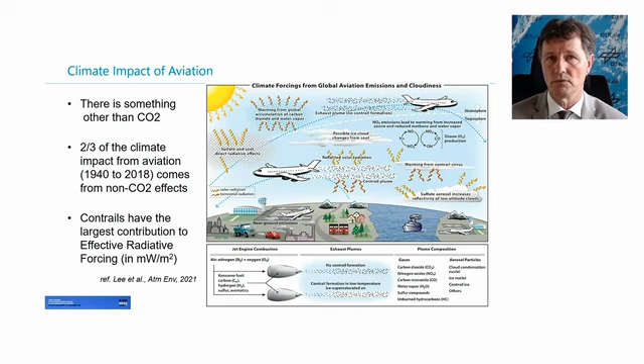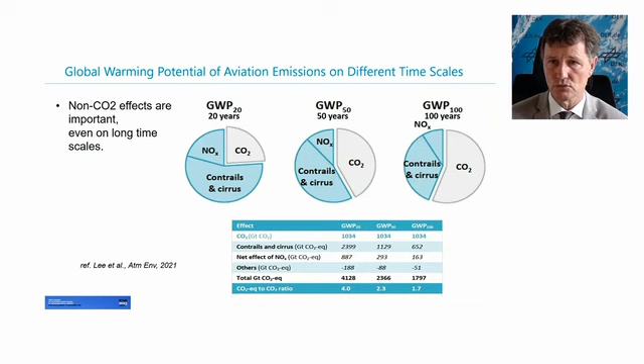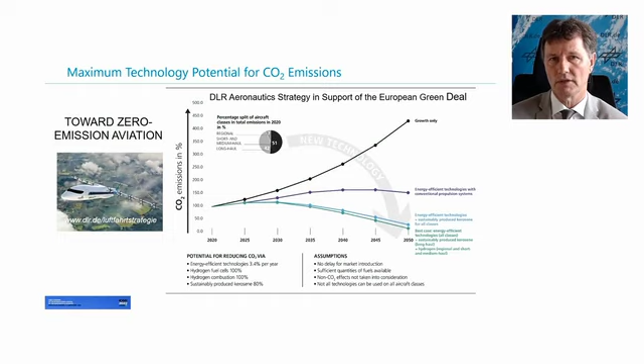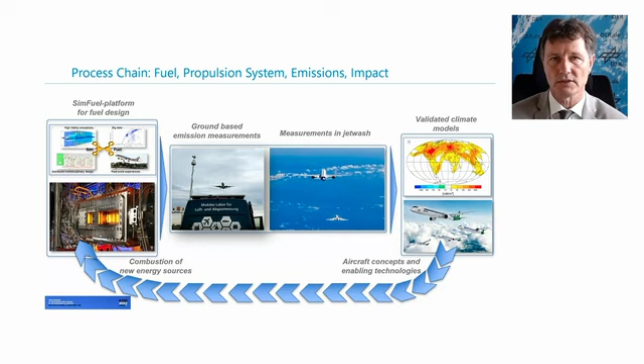Since 2014, DLR plus partners have systematically studied the use and impact of bio-based kerosene in three ECLIF campaigns under real conditions. The first campaign in 2014 with the outlined partners showed as a major result that a 50% blend with HEFA fuel, which is hydroprocessed esters and fatty acids, reduces soot by roughly 50%.

On top, the second campaign in 2018 showed that this 50% soot reduction results in a reduction of ice particles in the same order. In the recent ECLIF campaign, which Airbus has flown with Rolls-Royce, Neste and DLR, it could be shown that an A350 XWB-900 with Rolls-Royce engines was flown on both engines with 100% SAF fuel. A big success.

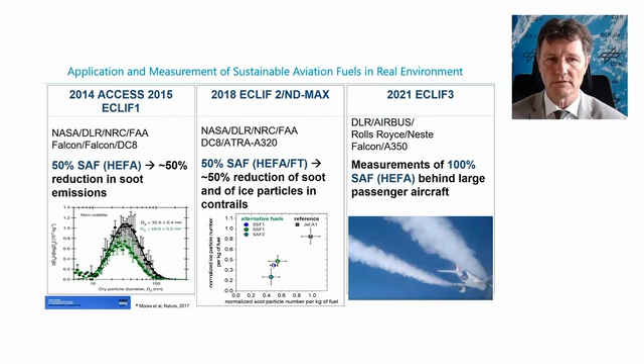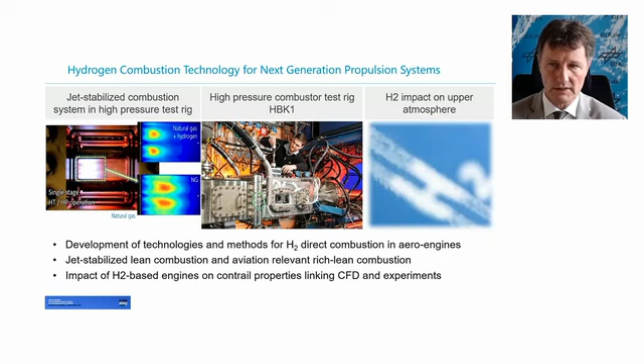Of course, the impact of released water by fuel cell operation is also part of these studies, but not shown in this presentation.

And with this slide, I will finish my presentation and thank you for listening.

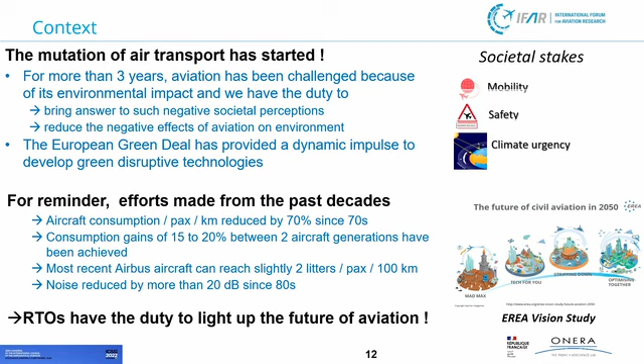And of course, we do that as a collective, like IFAR, for which we are speaking today. And it was also mentioned by Ibrahim earlier when he spoke about EREA, which is, let's say, the European sister of IFAR. EREA produced about 18 months ago its vision study about what could be the future of aviation in different scenarios in 2050. You've seen this slide so many times that I will skip it.

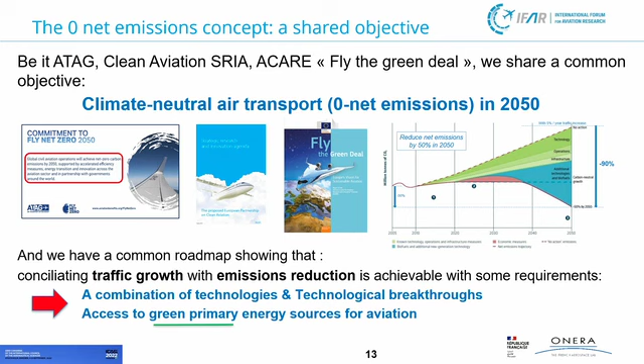We are all trying to drive this curve back. Maybe just one message here is to remember also that all the efforts and all the results will not necessarily be provided by the aviation community. For example, green hydrogen will probably be provided by specialists of that, because the need for green hydrogen far encompasses the needs of aviation alone.

So we have to reduce emissions - and what kind of emissions? I will quote again Markus saying CO2, but not only CO2. We will think about that. You have just here the reminder of the real contribution of aviation in terms of CO2 emissions.

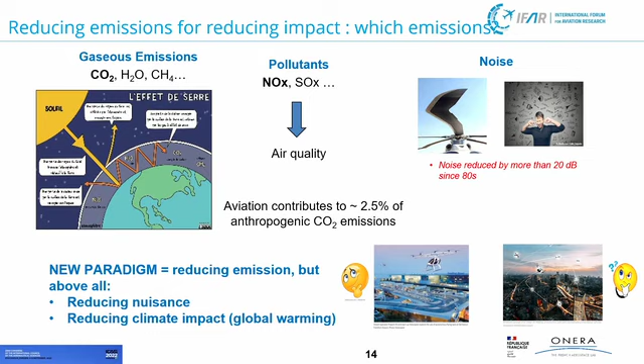How can we do that? I will try to illustrate that. We are working on 4 major axes: low carbon fuel, energetic efficiency, aircraft electrification, and operation. I will just select one example amongst many others in each of the first 3 axes.

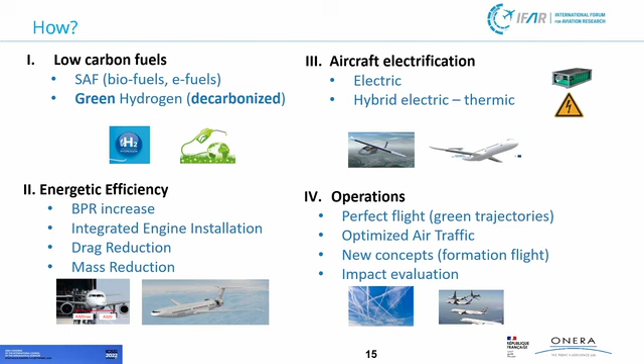Starting with low carbon fuels - Markus has spoken about SAF, so I will speak a little more about hydrogen. Once again, reminding that not all will come from the aviation community, but of course the aviation community has to face very interesting challenges in terms of technology, research, and also science to answer the hydrogen needs. And it's important also to remember that hydrogen will not be the answer to all the problems of all the segments of aviation. It will answer a part of it.

One of the major phases we will have to face will be the tank volumes, the cryogenic aspects, and the injection and combustion problems that it brings. On the bottom right of the curve, you can see a big calculation example made by Onera teams with a new injection chamber concept, including 4 injectors for hydrogen combustion.

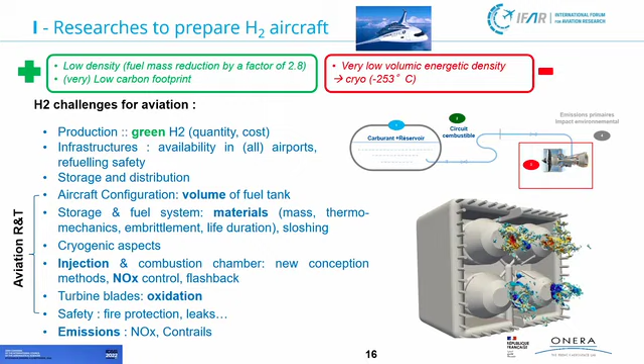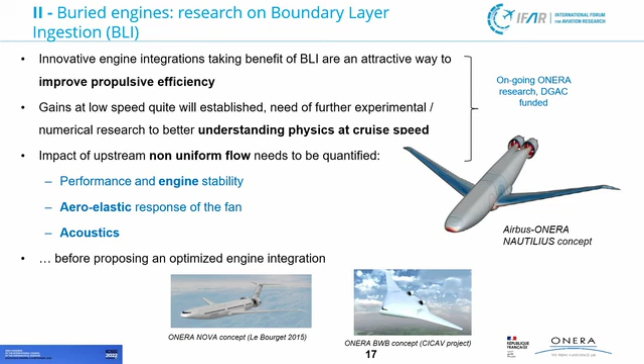On the second topic, improving propulsion efficiency, I've chosen to illustrate it with something called boundary layer ingestion, which is well known in some fields like low speed, but other fields have to be investigated. As you can see on this slide, there are quite different designs for the planes, and one interest of this BLI concept is that it can adapt to almost all kinds of configurations and propulsion.

Third axis, with 2 slides, is electrification. The first is to introduce probably the most important European effort under funding of the Commission, a project called IMOTHEP. You see the figures on the bottom right: 33 teams involved, from academics to big industry, 9 European countries, 2 international partners, under coordination from Onera. It's dedicated to 2 kinds of segments, regional transport and short and medium range, and we are working on conservative configurations going to far more innovative ones.

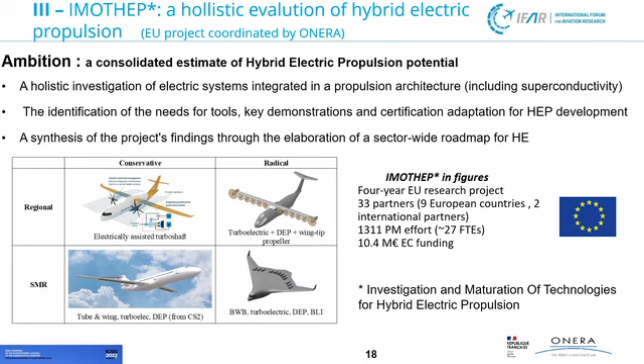The one in the bottom left of those 4 cases is a second slide, about a project called Dragon that we are leading. Dragon is funded by Clean Sky, which selected 3 projects for electrification. We were quite happy to see that the Onera concept was the one chosen to present at the last Bourget exhibition. As you can see on the slide, it's a mix of things already known and sometimes applied, like non-circular fuselage, as used by Airbus A380, and something totally new, like the distributed electric architecture you can see there.

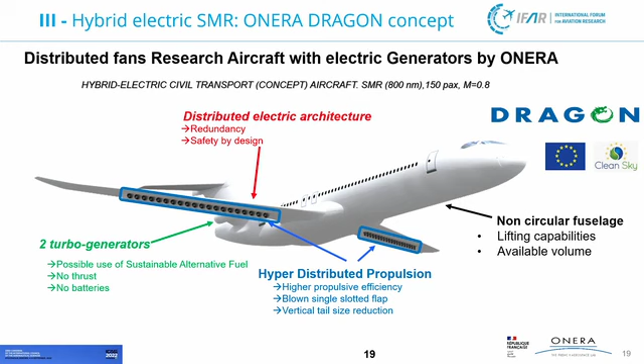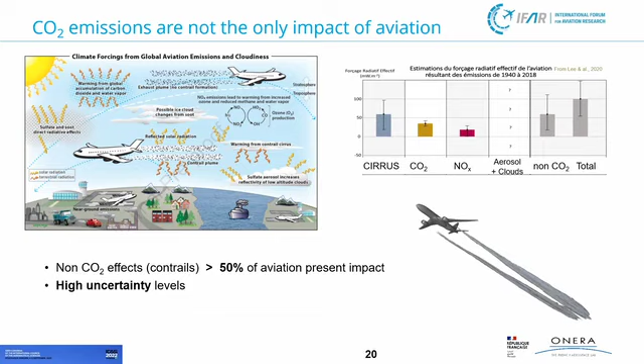So let's go back to the impact effect and CO2 emissions. Markus spoke about that. He remembered that CO2 effects are less than 50%. We still have to work on CO2, of course. One reason, illustrated at least on the right curve, is that it lingers longer in the atmosphere. That's the reason why we have to fight against that.

The other aspects, water, contrails, NOxes, the problem is that there are a lot of uncertainties about what they do and about their effect on climate impact, which is once again the driver. So we have to work strongly on that.

That's the reason why in France, DGAC has decided to launch a very strong study on that, bringing together people from the aeronautics family, specialists, for example.

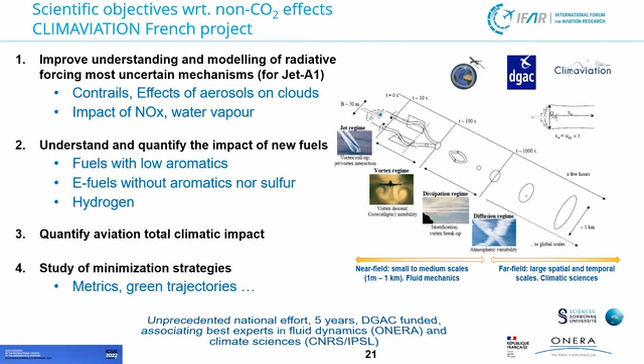Mixing people from the aviation community with experts from climate sciences, and we have been given the responsibility of conducting these studies.

Whatever the field, whatever the axis we select, nobody will accept any compromise on safety, of course. That's again a role we think is interesting for us RTOs, and that's one of the reasons why we have approached, individually and together, international entities in charge of security problems. That's why, as Ibrahim showed, we have made this partnership with ICAO, and in Europe we are working, as a group or individually, closer with EASA now.

Modelization and digitalization will have an important role in that, because we will not test everything experimentally, even if we will also have to progress on that. So we are all developing, often with the help of our governments, tools and means of calculation, because we already have large experience in that. Onera's codes have been used by industry for decades, but we also have to develop and improve them to answer these new challenges.

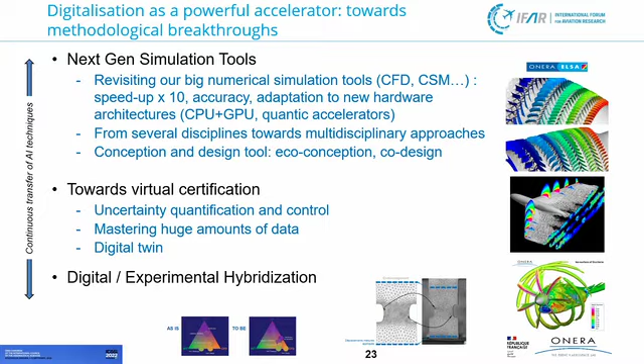As a conclusion, as I said at the beginning, we have a new challenge. We have strongly begun to prepare the answers and to work on it. We know we will have to evolve, to bring new things into our practices, like digitalization, electrification matters, and climate sciences. Once again, we think that we RTOs are able to bring something more, maybe because we are acting in a less competitive world than industry. This brings the possibility of more international cooperation. That's why for ONERA we have been involved since the beginning in IFAR, and we will keep being strongly involved in IFAR.

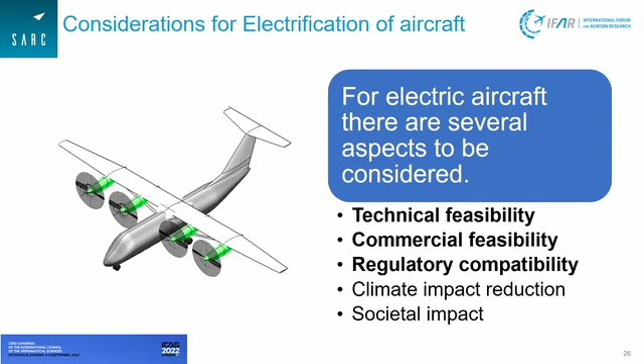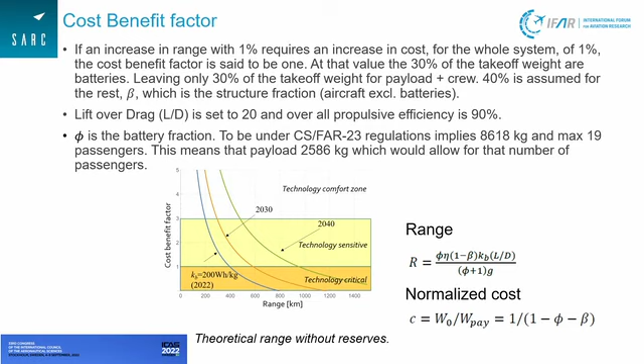But then we can also look at the hydrogen fuel cell combination. With pressurized storage, which I think is the more logistically easy alternative to cryogenic, we could still get up to more than 2000 kilometers and still have a reasonable payload fraction. Here we have used quite high L/D of 20, 90% efficiency of the propulsion system, and a 40% fraction for the rest of the aircraft which is not fuel or payload. This is a very sketchy way of doing it, but I think it says a lot, and you don't have to go much further to realize what the potential and limitations of the different technologies are.

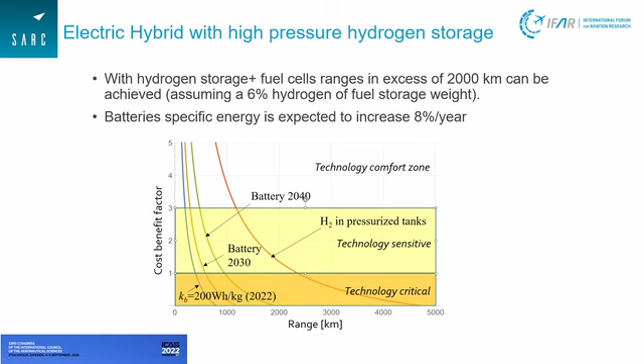However, it's also interesting to see what is the potential of these ranges. If you look at what we have in the US, we can see that only if you can fly 500 kilometers, it only corresponds to 5% of consumed fuel. This is flights in and out from the US. So it has a very limited climate impact in the foreseeable future.

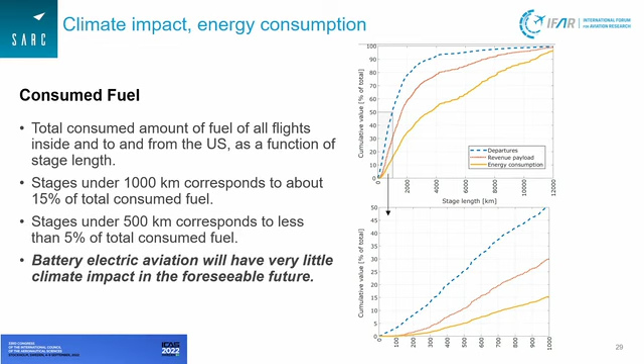Looking at Sweden, we have a population density as this. Most people live in the south. And if you look at the number of flights from different places, it looks something like this. About 520 kilometers covers about 50% of all flights.

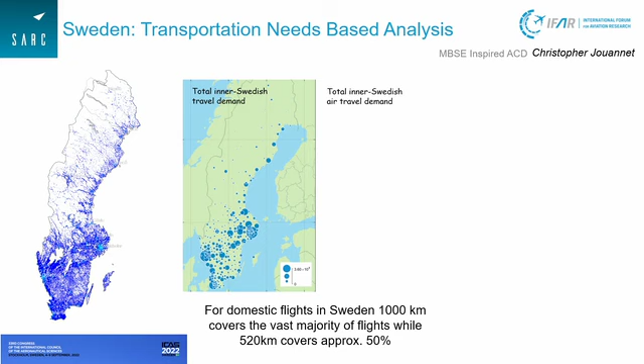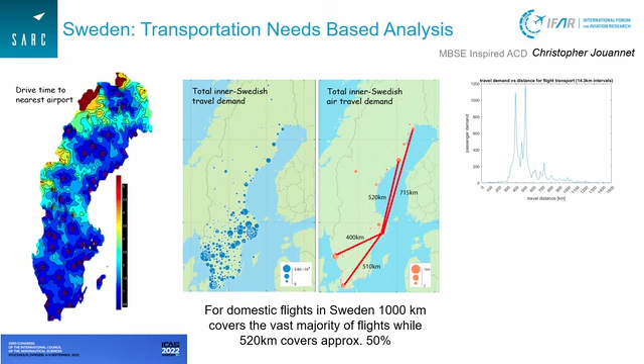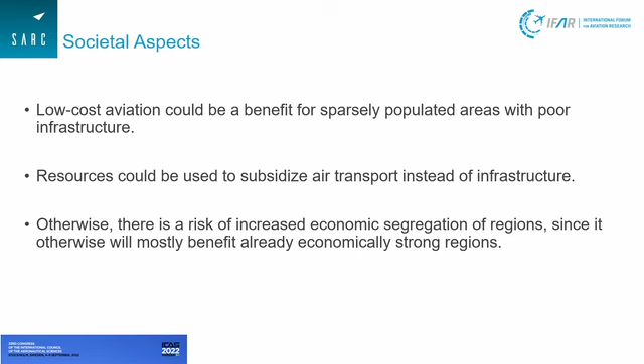This can be used to compensate for increased economic segregation of regions, since otherwise it will mostly benefit already economically strong regions.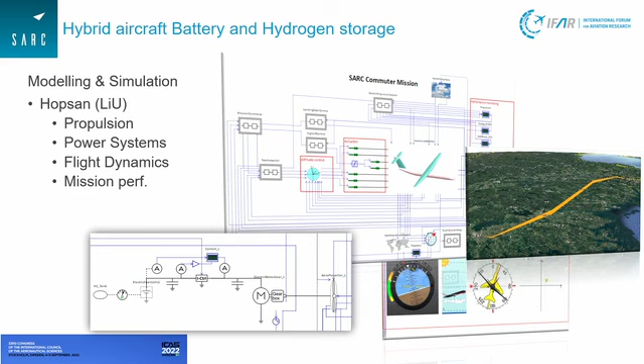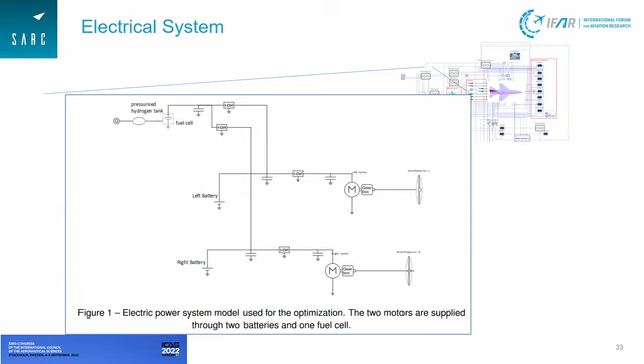I would just like to show a quick, more detailed analysis of electric hybrid aircraft, where we use system simulation and simulation-based optimization to optimize the different components. In this case, we have electric motors, batteries, and a fuel cell. We fly a mission of 500 kilometers and then 1,000 kilometers, using present-day technology: 200 watt-hours per kilogram.

Another limiting factor, which some people tend to forget, is the specific power of batteries. You cannot go up to more than 3C, or discharge a battery in less than about 20 minutes, before you deteriorate the life of the battery. For short durations, you can go up to 10C or more.

Another limiting factor is fuel cells. It's hard to say what the specific power is, but if you say it's 1 kilowatt per kilogram, that's approximately what a piston engine was before the Second World War. So we're looking at a DC-3 or something - it's a limitation on speed.

With pressurized hydrogen storage at 700 bar, we have a fuel fraction of just 6% - only 6% of the weight of the tank is actually hydrogen. Nevertheless, you have a specific energy that is several times higher than for batteries.

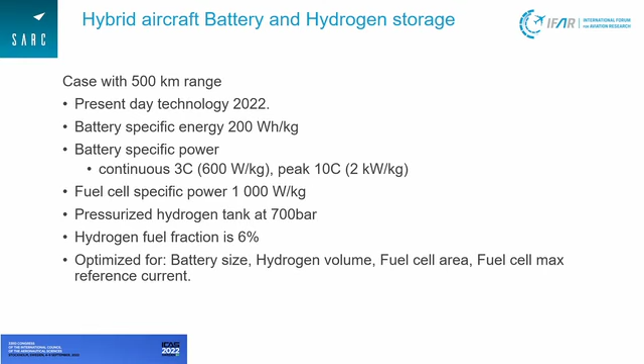So we optimize here for battery size, hydrogen volume, fuel cell area, and max current. You can see that the batteries automatically adjust to take care of the takeoff part. There is some excess power available from the fuel cell that can augment the takeoff and climb part, because there is a balance in the fuel cell between weight, power, and efficiency.

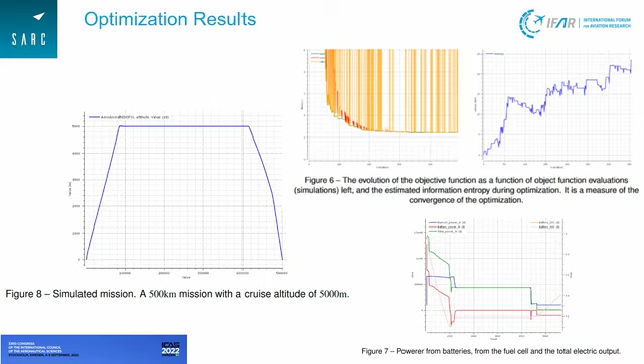So if you want to have a low weight of the fuel cell, you will sacrifice some of your efficiency.

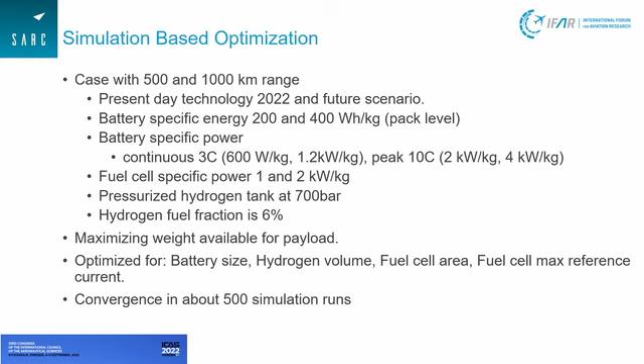We looked at two cases, 500 and 1,000 kilometers. I'll just skip to the result. For the 500 kilometer range - this is theoretical range, no reserves - we can have 2,300 kilos in payload mass.

If we go to 1,000 kilometers, we're down to 1,900 with present-day technology. If we go further and double the specific energy of batteries and the specific power of fuel cells, we get up to 2,500 kilos. We also see that the fuel cell mass goes down dramatically, from almost 1,000 kilos to less than 500 kilos, and that could be used instead to increase the speed of the aircraft.

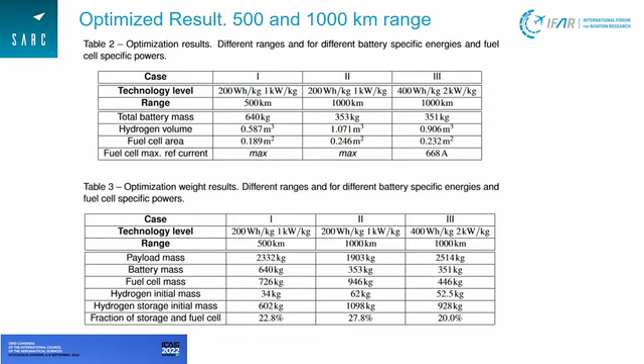In this case, it's only 360 kilometers. So if you look at conclusions here: we have technical feasibility for battery electric aircraft, but I think the technical feasibility is only for very short theoretical ranges, less than 500 kilometers. Commercial feasibility is for niche applications, for instance island hopping, where there's no real competition from roads. The climate impact, however, is quite small.

Electric hybrid aircraft, battery plus hydrogen, I think have significant potential in regional transport. We can have theoretical ranges less than 2,500 kilometers with pressurized tanks, and the limitation on speed, due to the specific power of fuel cells, will likely be lifted as development continues.

We're still early in the development cycle of fuel cells, I believe. So the commercial feasibility is there for commuter aircraft. The climate impact could potentially be something like 30-35% if you look at flights inside and out from the US. In Sweden, it would cover most of the domestic flights, actually.

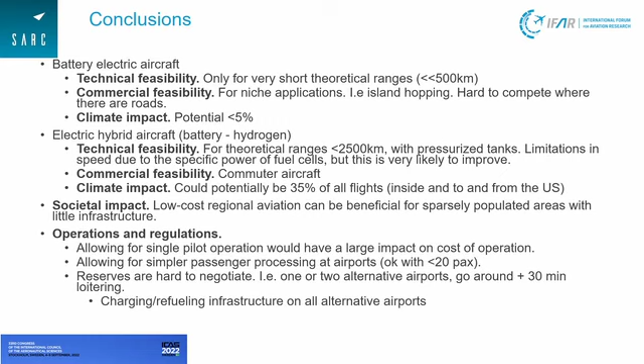We also need to have charging and refueling infrastructure, also at alternative airports, probably to be able to go there. And not least, we also need to have in place better, more precise regulations for electrical environments, like being able to deal with electric charging at airports.

So I'm putting here a chart that's very familiar. Sometimes you put passengers or cost on the vertical side, again concentrating mainly on electrification. You'll see the wattage there. So we talked about the energy density. I think Peter talked about the energy density of batteries, etc. Just to give us a reference, you'll have the current jet fuel kerosene energy density, which is about 12 kilowatt-hour per kilogram, but you apply essentially the efficiency of a gas turbine, the usable energy is in the order of 6,000 watt-hour per kilogram.

Because we have to fly, and not only on the road, we not only care about the energy density of the fuel, but we care about the power density of the power plant itself. So typically, as a reference, smaller gas turbines will give you in the order of 2 to 5 kilowatt per kilogram. And if you're looking at modern turbofan engines, it's in the order of 10 to 15 kilowatt per kilogram. So where are batteries? What I'm trying to portray here is the design space, how far are batteries of today, and how far can we extend them?

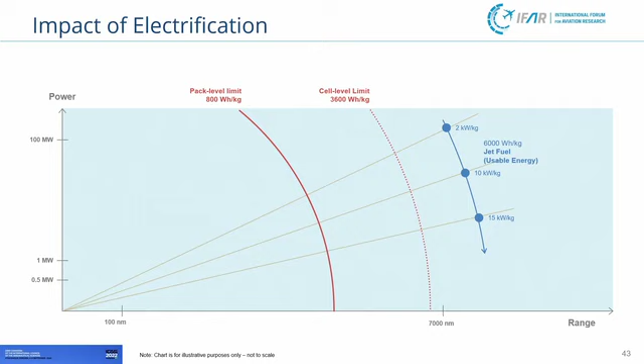So you can see, theoretically, I'm a chemical engineer, as Dimitri introduced me. Maybe we can talk a little bit about the current chemistry here. At the cell level, you can theoretically draw out about 3,600 watt-hour per kilogram. But obviously, as you become more practical, you try to package it. Even the theoretical limit at the pack level is in the order of 800 watt-hour per kilogram. So you're already 4 times reduced. Then, if we look at the state of the art of battery technology today, again at a pack level, we are typically in the order of 270 watt-hour per kilogram.

And if you decide to go out and buy a battery today, 99% probability it's designed only for automotive application, then you are way out in the corner there, which is around 170 watt-hour per kilogram. Now, a modern turbofan engine on a 300-passenger aircraft will require approximately 25 to 50 megawatt per engine. So it's fairly way out there. So when we say electrification doesn't take us there, it's way out of what the theoretical battery chemistry can provide. So clearly it's out of range.

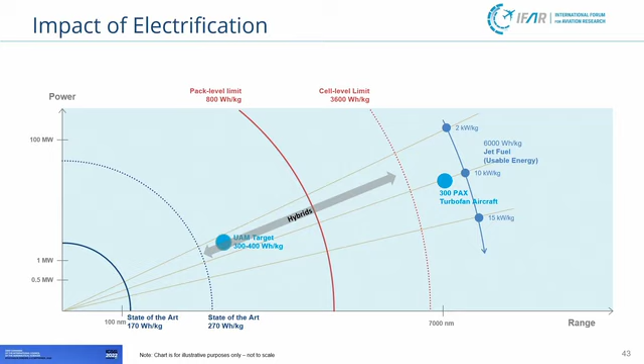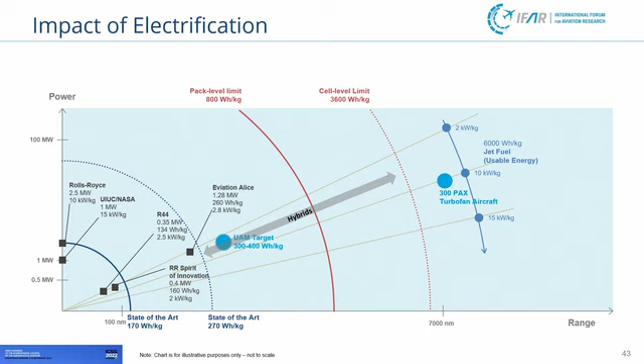But look at the UAM target. The UAM target is sub-megawatt power, and it's within the theoretical package limit. So there is still a little space to be optimized. Now, obviously, we've got hybrids. Hybrids will give us bridges in between, hopefully with sustainable aviation fuels. And if you look at the current examples, most of the demonstrators that we've been flying are very much still in the corner. So the message here is the battery technology has a huge theoretical capacity, but the practical capacity is way down. And we're really experimenting with batteries designed primarily for automotive application.

Here is a small video that shows you at NRC, my own organization, we are also experimenting a little bit. We're learning by doing, if you will, using a general aviation aircraft. It's a Cessna 337, very much like what Ampaire did a few years ago. Here we took the back engine and replaced it with a 160 kilowatt battery-driven drive. And we just took this up in the air this last winter. You can see in the background a good Canadian winter there. So there is a lot of learning to be had, is the point.

First, I think this was mentioned here, when it comes to specific regulation, there's essentially nothing by way of regulation that would state battery design, or even the overall integration of the power system. So we had to bring in the regulators with us. We've been learning together with the regulators. And that's, again, the advantage of an RTO. A very important thing that we've learned is the thermal management side of the batteries. It's absolutely critical in the system design, but also in the operation of it.

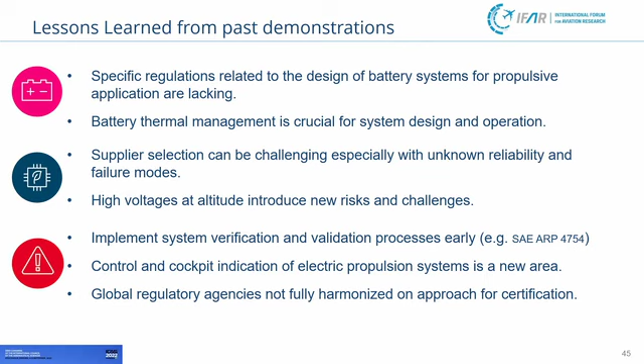Finally, this was also already mentioned, if you look at battery-powered electric aircraft certification, the global harmonization, we haven't arrived there yet, and there's still some work to be done. A particular example is the Pipistrel trainer, which was certified in Europe 2 years ago. When it comes to North America, I think that's still in the process. So enough about the smaller scale.

What takes us now from a smaller scale demonstrator to this larger hybrid, and these are some of the examples that are out there that we look forward to learning from, now at a higher power rate. I've given here just a couple of examples on the European side. On the Dornier 228, we're replacing one engine by a 600 kilowatt motor, and you've seen the middle one before, even in yesterday's talk here, a Saab 340 now replacing one of them with 1 megawatt.

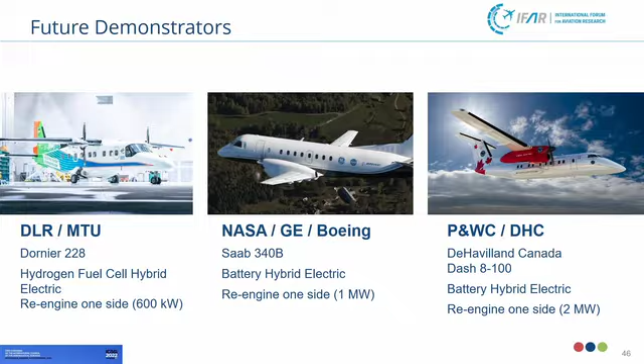On the Canadian side, we're also looking at a similar demonstrator, taking a Dash 8 100, which is a De Havilland Canada and Pratt & Whitney Canada collaboration, where we're now replacing one engine by 2 megawatts. So these are actually happening in the next few years, in the near term, and we'll be learning quite a lot from these demonstrators as we upgrade the electrical power requirements.

Now, I just want to mention a couple more points. One is about battery design. I indicated that current day batteries are really optimized mainly for automotive application. So if you start from a theoretical specific energy, let's say from a really aviation-specific application, you will have fluoride carbon lithium, you will have 3,600 watt-hours, but as you come down to an actual pack-specific energy, there is a 4 to 6 times reduction.

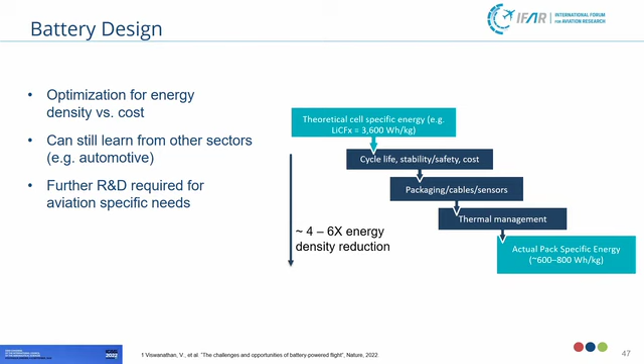That's something I think we can, on the aviation side, really put more focus on and be able to optimize even further. So further R&D is required for aviation-specific needs.

So what that means is, if we want to fly at an altitude and we want to really reduce the size of the cables, etc., and really optimize the voltage, then we've got a design barrier that we need to really deal with.

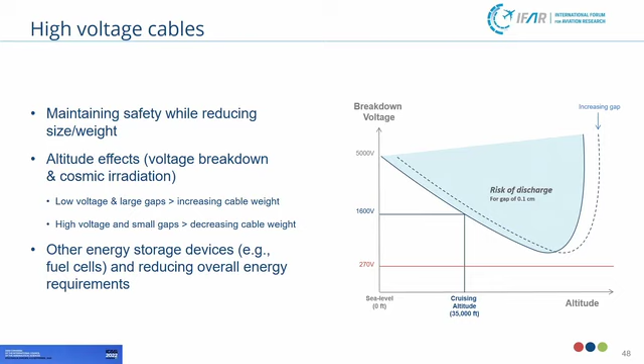Here we just showed one possibility of trying to expand that a little bit further. If you can use the gap and the connectors, that will move the design space to the right a little bit and allow us to carry even higher voltages than we would be risking. So it's just a very key point. I think yesterday it was also mentioned here.

It's not a really sexy part of the design, but the cables can be an area of high research, whether it's advanced materials on the insulation side or lightweighting itself, but also on better conductivity.

So one last point here is about test facilities. Now, we are RTOs, and we tend to own these large infrastructures where we do compliance by testing. We will have to certify these products, and they won't be certified by analysis, needless to say. So all of us are essentially building parallel facilities that would eventually become the compliance capability as we bring in all these new technologies.

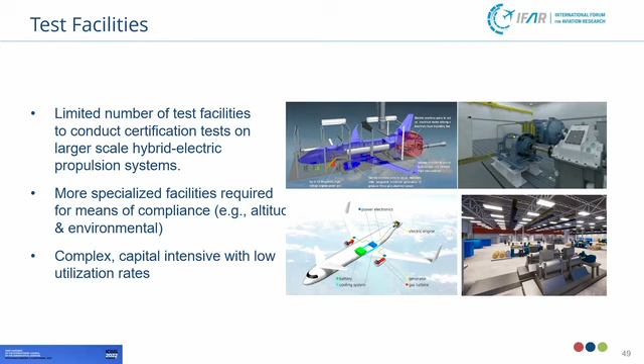This could be a flying platform, this could be a static platform. I think the point to make here is they're going to be more specialized and complex, and as a result, they will cost a lot, but also they're going to be low utilization.

So here again is IFAR, an organization of RTOs, where we discuss in our IFAR meetings what we are planning in terms of upgrading facilities for better complementarity and maximizing utilization, such that we can accelerate putting these certified products out without compromising safety.

So in summary, electrification is part of the solution, but we should still keep an eye on it. It's 27% if you look at the two classes of the aircraft, but that 27% is also very important. And I think the batteries are optimized mainly for surface transportation, and there is some work as a community we can do to eke out what's available from a theoretical energy density perspective.

High voltage cables, again, have very little research in that area. From a material side, there is a lot that can be done. And cooperation in general is very much needed if we want to really decarbonize the full sector and harmonize the regulation of the certifications that we all need before we put this thing up.

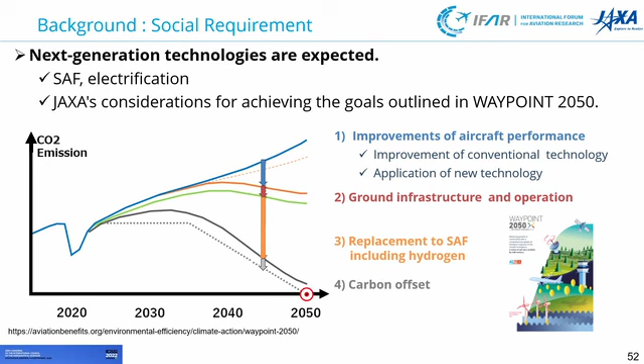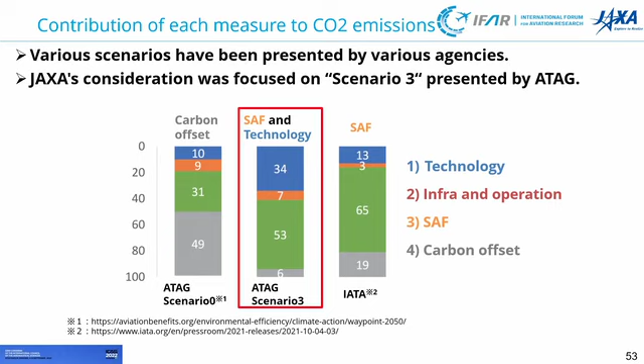And even if the SAF production issues are solved, there is another important point to consider. That is the CO2 reduction rate during the life cycle of SAF. The CO2 reduction rate of an ideal SAF is 1.0. This would achieve the goal by replacing about 90%.

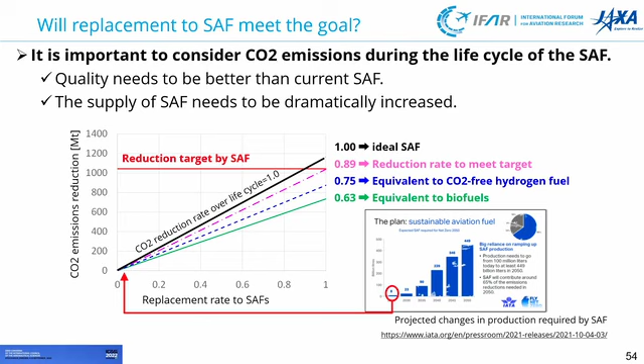However, the current reduction rate of biofuels is set to be about 0.63, and even for CO2-free hydrogen, it is 0.75. So therefore, I think it is important to improve the quality of SAF or reduce the dependence on SAF replacement. So increasing dependence on technology, for example, making aircraft more fuel efficient, would be very effective because we can set a reduction target to a lower value. So this is why JAXA is considering ATAG scenario 3 as a basis.

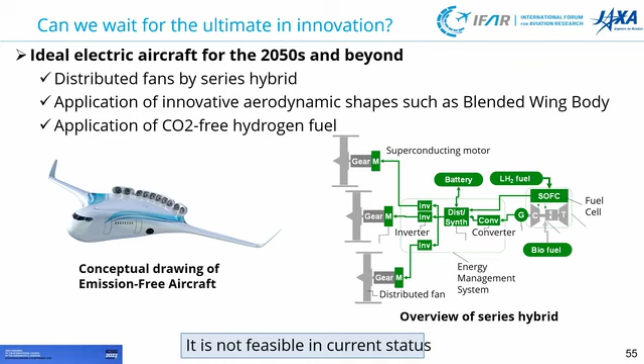So the problem is the timing of its realization. Of course, we cannot show its feasibility with the current technology. So JAXA has set the date of realization for 2050 or later. So it is important to develop technology for such an ultimate goal, but it will not contribute to the realization of the global goal. So what we should do? As one answer to this question, we believe that several steps of technological development should be done. In other words, agile development is required. But there is one barrier to agile development, that is a business model. So next, I would like to consider the relationship between technological development and business models.

For example, narrow-body aircraft with an EIS, entry into service, in 2020 will take 20 years to reach its maximum number of aircraft. And 20 years later, in 2040, the next generation of narrow-body aircraft will be developed, and as the number of next generation aircraft increases, the number of first generation will decrease. So based on this business model, in 2050, there will be wide-body aircraft developed in 2030, first-generation narrow-body aircraft and second-generation narrow-body aircraft. At this time, what should be the target reduction rate of fuel consumption for second-generation narrow-body aircraft to satisfy ATAG's Scenario 3 goal?

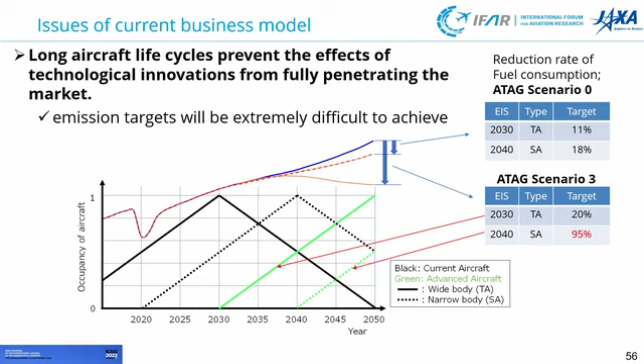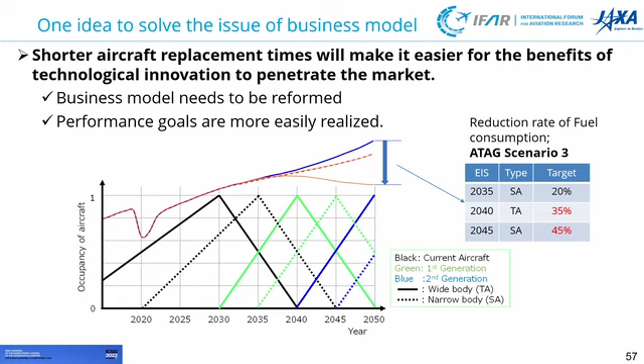So I would like to summarize the discussion so far. It seems that emission targets are difficult to achieve by simply replacing SAF. So therefore, it is necessary to develop technologies to reduce fuel consumption. Since hydrogen fuel is also a candidate for SAF, we need to reduce fuel consumption regardless of the type of fuel. And aircraft electrification technology is a promising technology from this perspective.

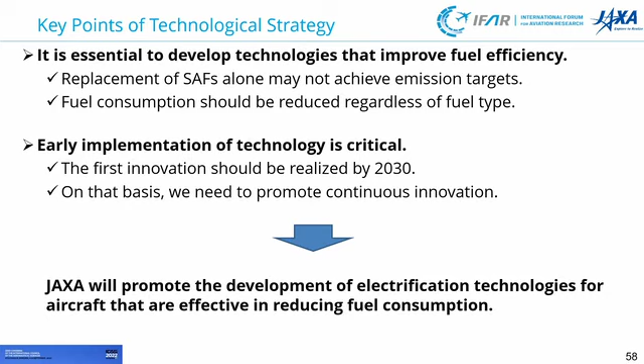And the next point is that early implementation of technology is critical in the current business model. Since we cannot wait for the ultimate technology development, agile development is important. And JAXA is considering a technology development scenario for aircraft electrification based on these summaries.

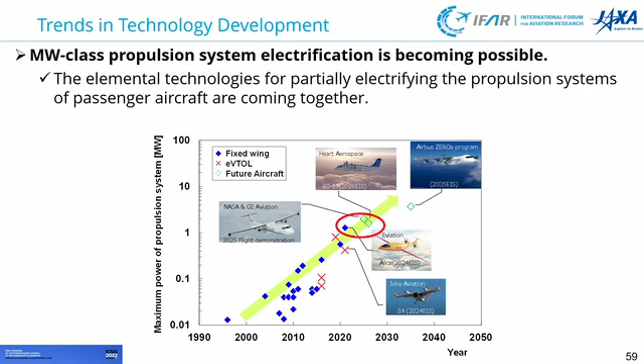If turboprops are the target, as shown in the previous slide, there are examples of technology demonstrations, so the technology is considered to be ready. However, turboprops account for only a small percentage of the total aircraft fleet, so their contribution to the emission target will be small. On the other hand, if wide bodies are targeted, the contribution to the emission target will be the largest, but technology development would be very difficult. So therefore, JAXA has chosen a narrow body as a target. And our aim is to expand the possibilities of electrification technology.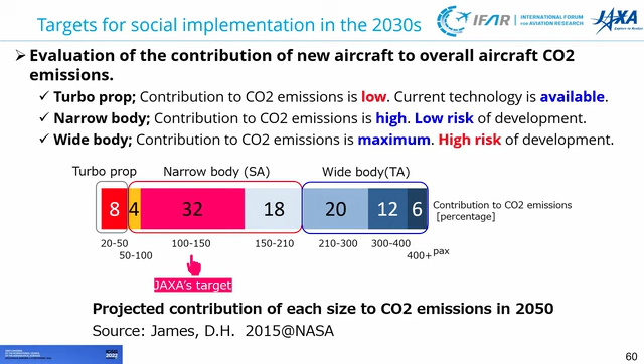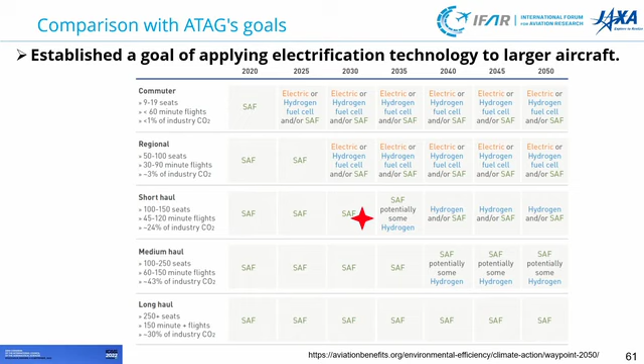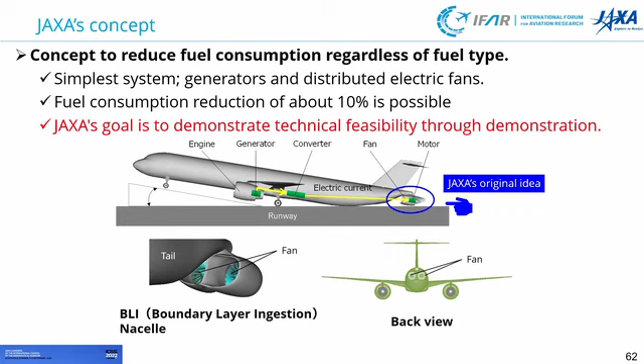The BLI nacelle is expected to improve propulsion efficiency more than the losses associated with electrification. Our analysis shows that the entire system is expected to reduce fuel consumption by about 10%. So JAXA's goal is to complete the elemental technology demonstration of these systems by 2026. Okay, thank you for your attention.

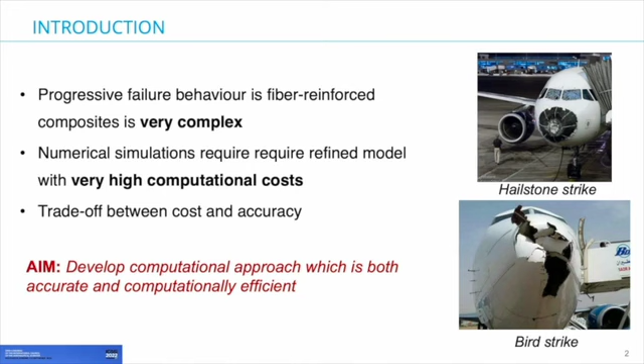This is achieved using the Carrera Unified Formulation, or CUF in short, a mathematical framework used to derive higher order structural theories in a generalized manner. In a nutshell, this involves the use of expansion functions within the numerical framework to enrich the kinematic approximation of the structural model.

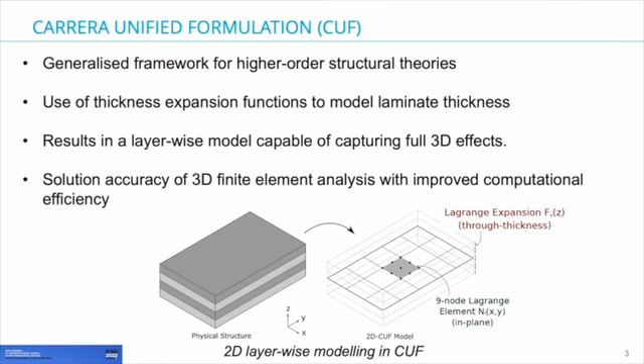Multi-layered structures, such as composite laminates, are modeled using 2D finite elements to describe the in-plane geometry, while 1D expansion functions, based on Lagrange polynomials, describe the thickness of each composite ply. This leads to a fully layer-wise model with accuracy approaching that of 3D finite element analysis, but with significantly reduced computational costs. This is the main advantage of the proposed approach.

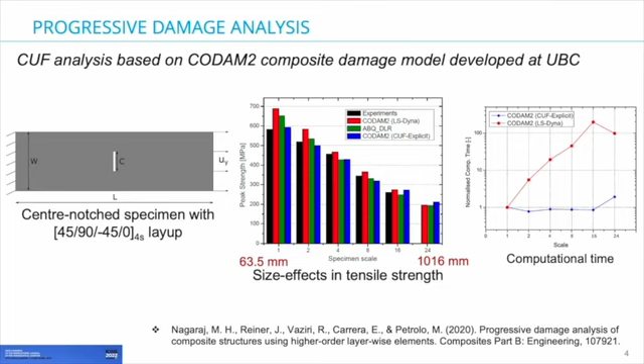Comparing the computational cost between FEA and the proposed CUF approach, we can see that as the structural size increases, FE-based analyses require orders of magnitude more analysis time compared to CUF models. This is due to the use of higher order interpolation and expansion functions in CUF, which significantly reduces the computational size in terms of degrees of freedom without compromising on the accuracy. This is the key advantage of the proposed approach.

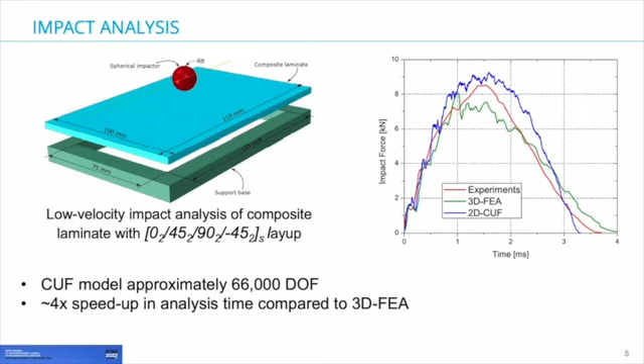In conclusion, within this work, we were able to demonstrate the capabilities and advantages of higher order numerical models in the progressive damage analysis of composite structures. This is a topic which is largely unexplored in the available literature and constitutes the main novelty of the work.

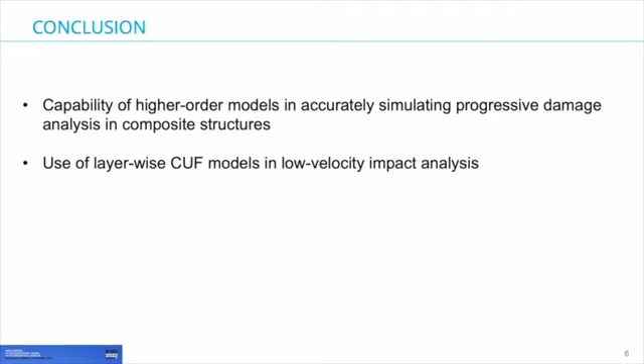We were also able to demonstrate the capability of layer-wise CUF models in highly nonlinear problems such as low-velocity impact analysis. The advantages of this approach based on higher order models are the accuracy and significantly improved computational performance compared to standard numerical approaches based on finite element analysis. These advantages make it a promising candidate as a numerical testing platform for the design and analysis of composite structures.